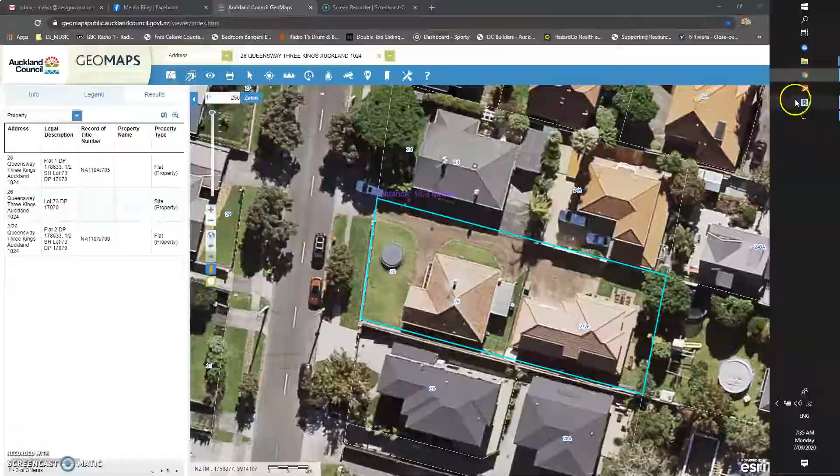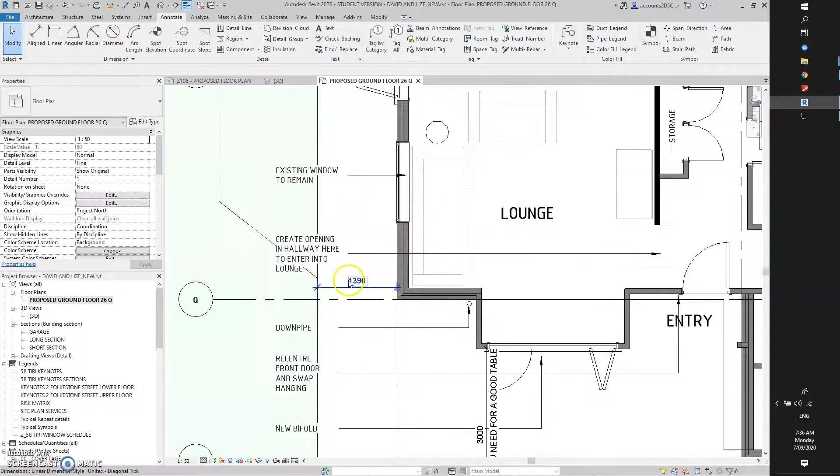So going back to this, I've plotted the driveway line. If that's the driveway line there, we still, with this deck, are 1390 away. Now I wasn't too sure what you want to do with the side. Do you want to get closer to this driveway line, or do you just want a path of say 1400 wide? Or did you want an area out here where it's a bit wider?

I'm not entirely sure what your right of way boundaries are, to be honest. I know that's a given line, but does it follow these angles, or does it just go straight through? So that's one item, the side of the deck, the walkway, because obviously this will change this point. It'll move this point out if you decide to make it wider.

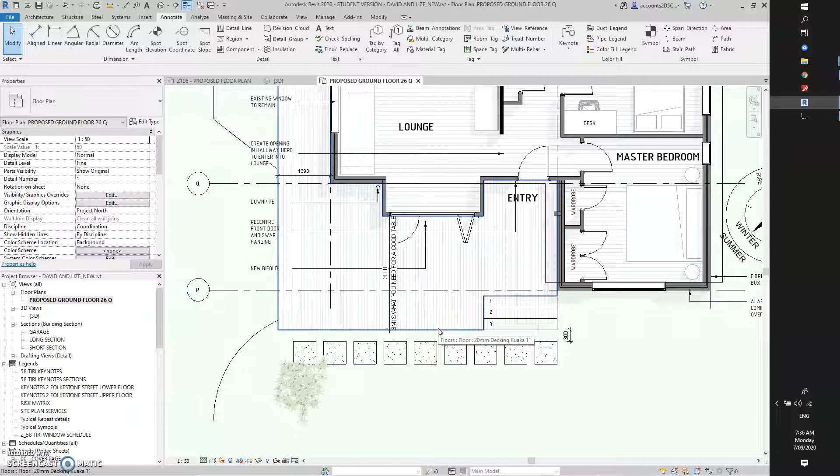And then just very basic, a big level deck with not a lot of steps, all set up so it's pretty much flush with the floor area. You come out of the bifold or the front door, make these steps coming down to the entrance, make them as wide as lining up with the building.

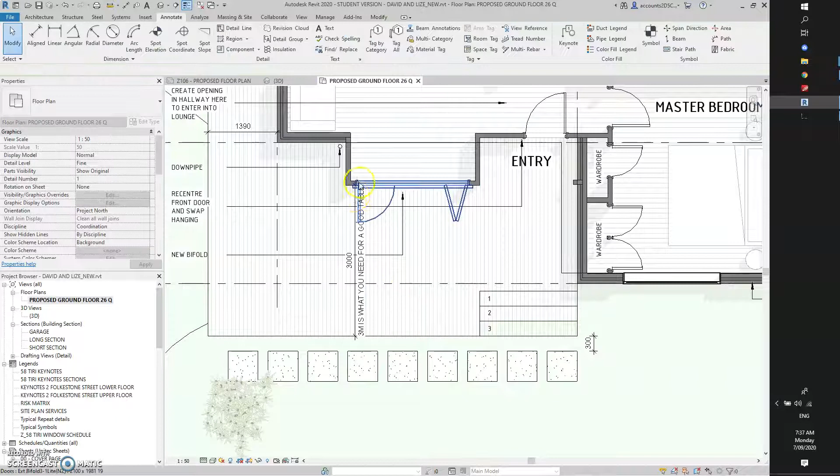So it's sort of directing you to there. You could make them slightly narrower, but I think it makes sense making them as wide as that area there. Now, the driver behind the front of the deck, 3 meters from the front of the wall to out. That's big enough for an outdoor table and chairs.

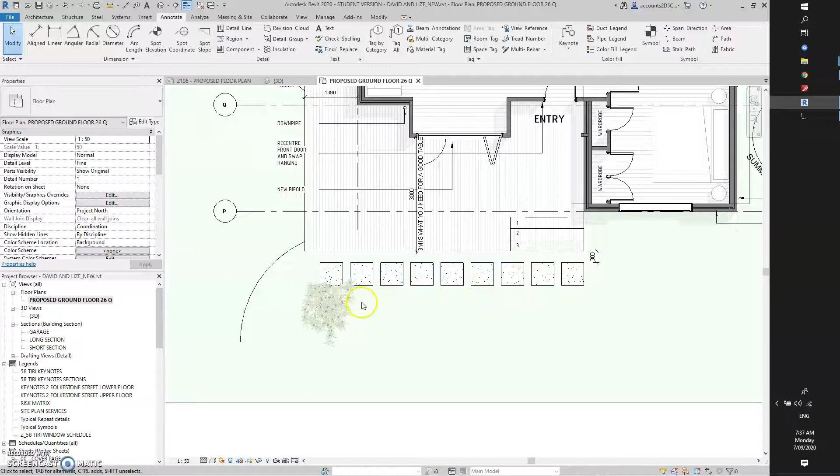And then just something very simple like a paver set out 300 mil out, and you could have some edge boxing or some timber creating this entry. I'm not 100% sure how big you want this in terms of planting and how big you want the other side in terms of planting, because that will determine...

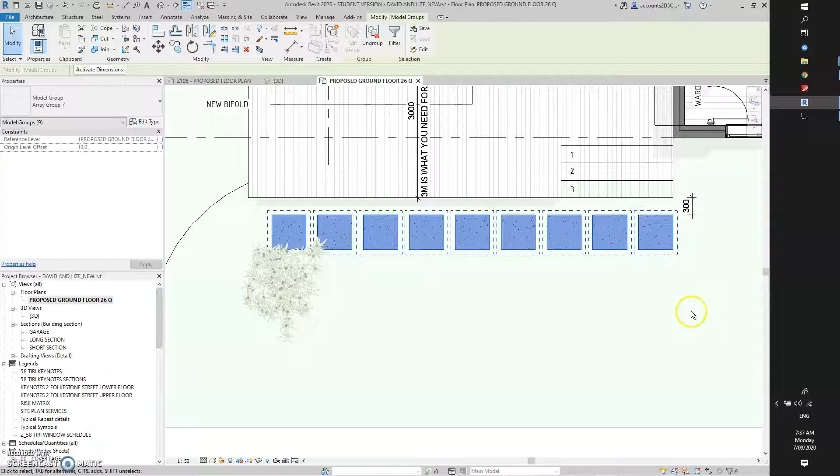If you know what I mean, if I do this and I sort of move all these pavers down, if I move them all down, well then if you did do planting, this would move further down, if you know what I mean.

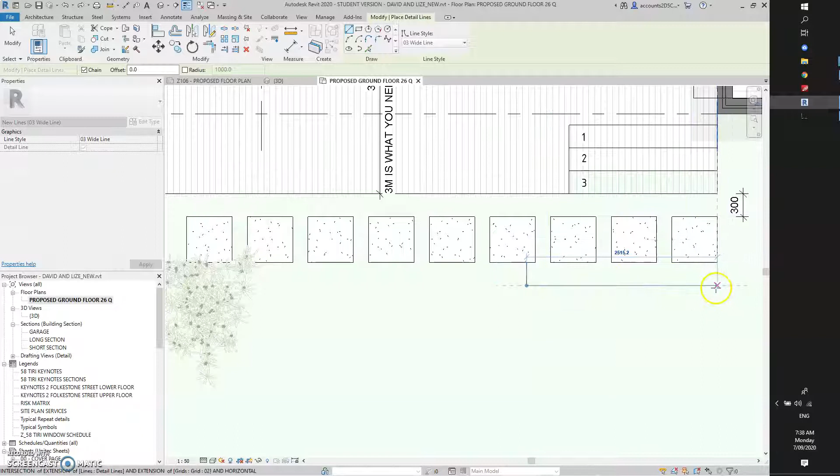So at the moment I've got a 300 mil gap and 200 mil between the pavers, which is quite common. So you'd probably have, if you had 300 mil there, you'd have another 300 mil this side, and then this would be boxed in timber, running to wherever the path, to your fence line. I'm not too sure where your fence line's running.

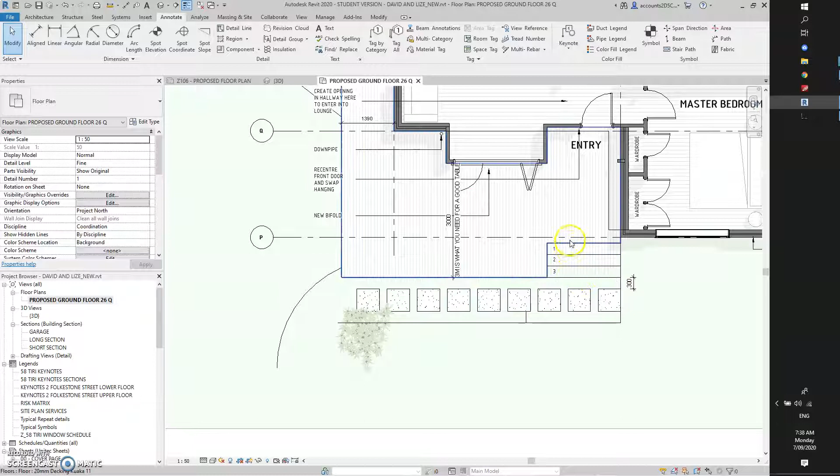But you'd have all this gravel or pebbles, like white pebbles, and then the pavers sitting in, or you could have this concrete or grass with planting. I'm just not sure what you want to do with this front bit, but that's what I'd do with the deck. 3 meters out, recess the steps in, so they're not sticking out, they're sticking in the deck. And then it's a question of just what this path's doing.

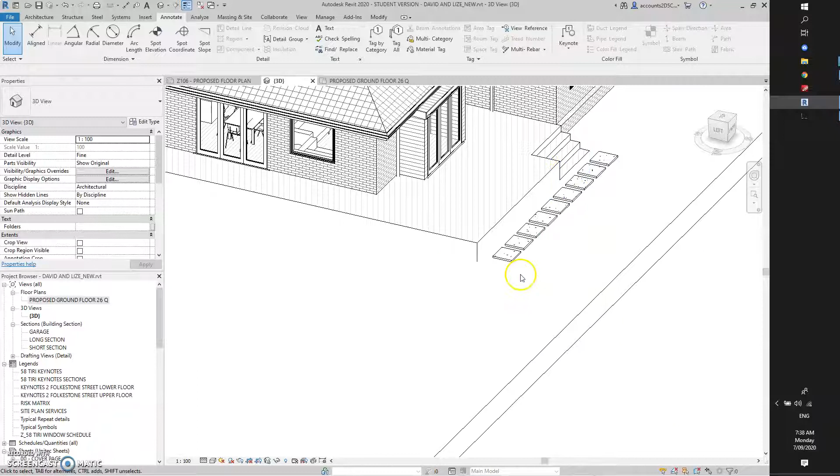But I'll just show you on the 3D, it's very basic, but you walk up, so those are the pavers. I'll just remove this planting for now, just show you what the planting... but you kind of walk down the pavers, and then you come towards the stairs which line up with the front door, easy as.

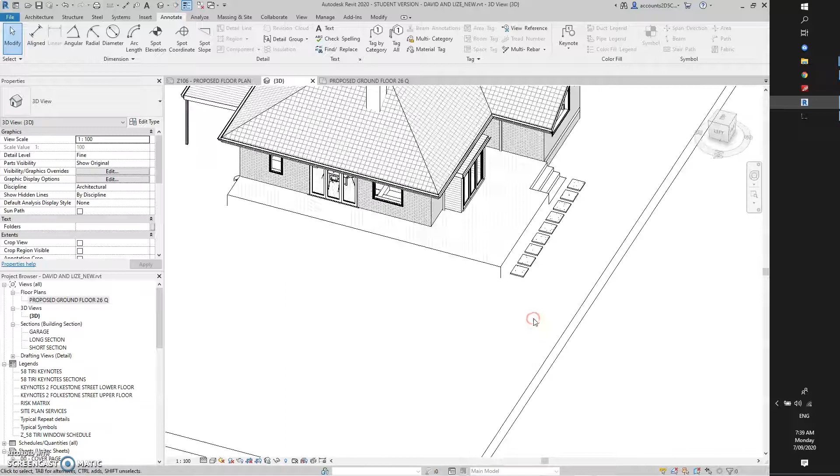You could do, if you really wanted to, which is quite cool, rather than these pavers, you do big platforms of concrete, and then there's grass around that, so that always looks pretty cool. But yeah, that's pretty much it. It's just determining how wide to make the side deck, and then what's going on from the front of the deck to the pavers.